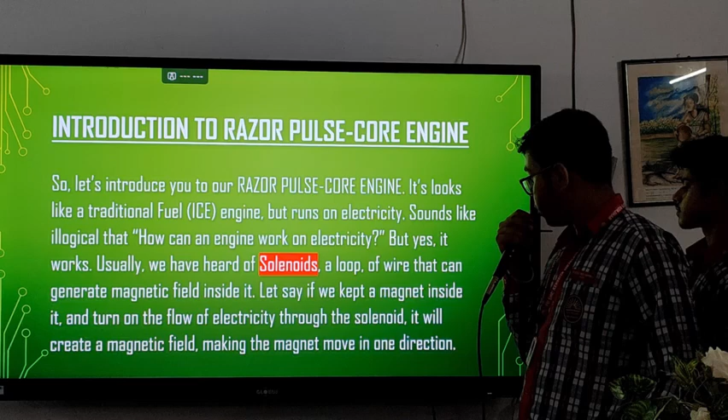But yes, it works. We've heard of solenoids, a loop of wire that can generate a magnetic field inside it. If we keep a magnet inside it and turn the flow of electricity to the solenoid, it will create a magnetic field, making the magnet move in one direction.

Now what is the use of a solenoid? As in IC engines, there are fuel systems, spark plugs, and camshafts that burn fuel in the cylinder, creating a blast and making the piston move. Similarly, the solenoids here act as spark plugs that push the magnetic piston downwards, making the crankshaft rotate.

Now, magnetic pistons. We usually hear about pistons. As mentioned in the solenoid topic, pistons are the parts that help generate torque through the crankshaft by having a linear movement. It goes up and down.

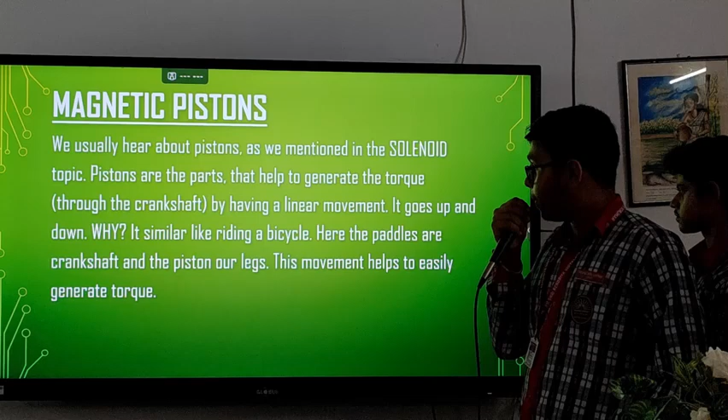It's similar to riding a bicycle. Here the pedals are the crankshaft, and the pistons are the legs. This movement helps easily generate torque.

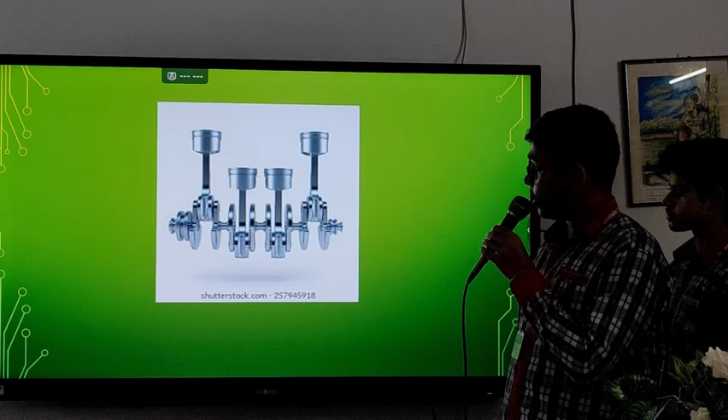Now here is the image of a crankshaft. You can see that the pistons are connected with the crankshaft, which helps move the crankshaft and produce torque.

Now let's bring it to real life car implementation. We have taken our sample model, our design, the Sam Legacy Light GT. We chose this as its manufacturing cost is low, and it has a powerful engine that will help us realize high power performance.

Now we have made the car, but there's still a question: why are we using an engine that runs on electricity? The main reason is that it supports our regen tech. Let's know what our regen tech is and how it supports our RPC engine.

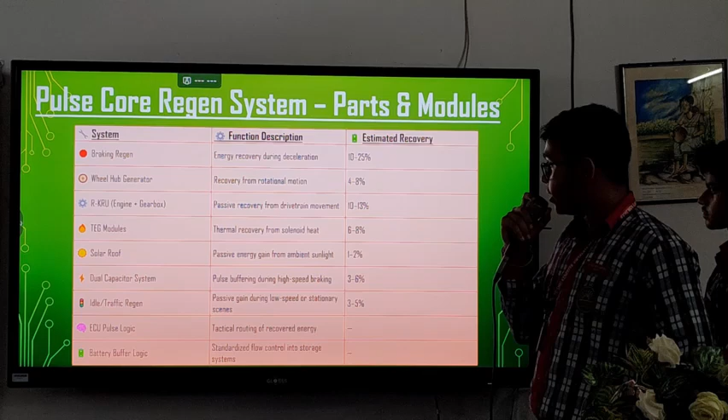Now let me introduce our next part, the Pulse Core regen system, parts and modules. It has the following parts: braking regen, wheel generator, R-KRU included in engine and gearbox, TEG module, solar roof, dual capacitor system, idle traffic regen, ECU pulse logic, and battery buffer logic.

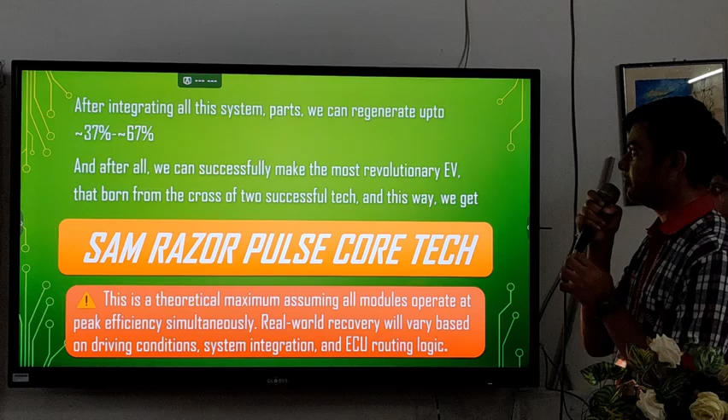These each contribute 10 to 25%, 4 to 8%, and at the end 3 to 5%. After integrating all these system parts, we can regenerate up to 37 to 67%.

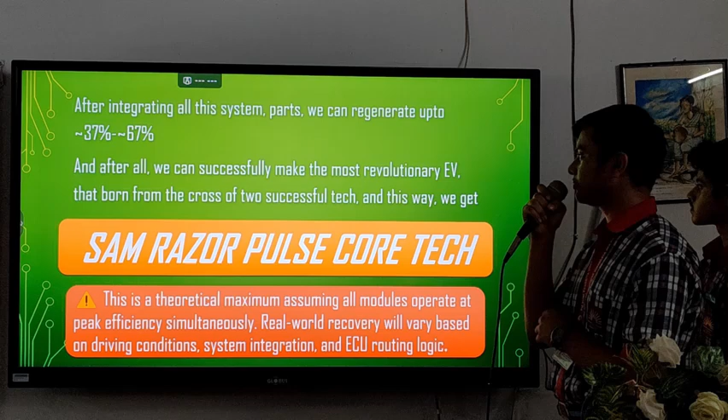After all this, we can successfully make the most revolutionary EV, born from the cross of two successful technologies. And this way we get the Sam Razor Pulse Core Tech.

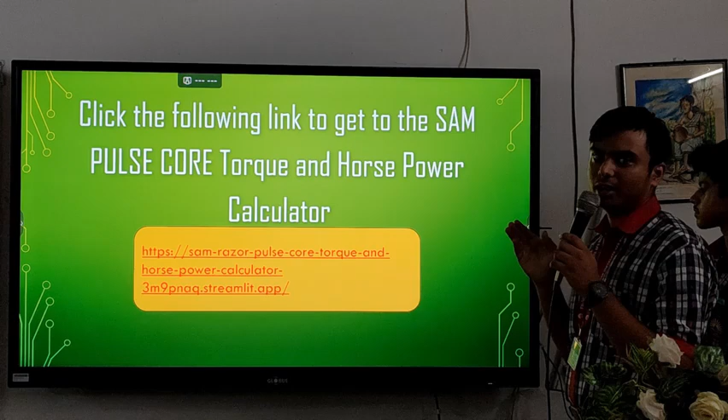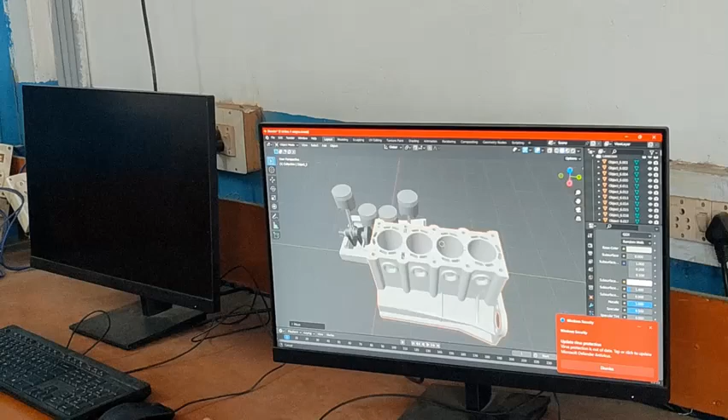Here we can attach the solenoid bobbins. Now these are the magnetic pistons. On these pistons, we will attach magnets on top so that the magnets can be easily repelled.

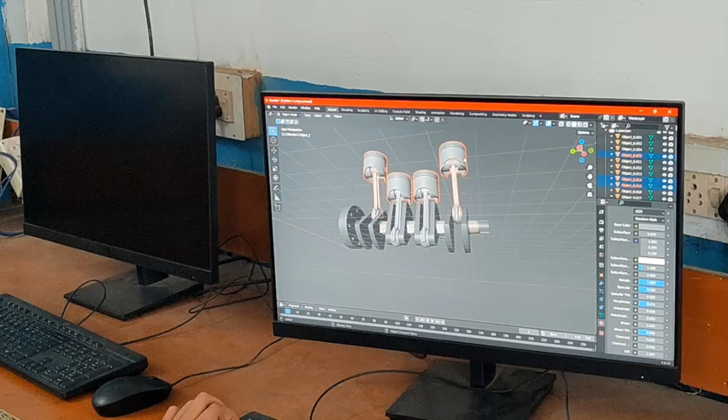Now this is known as the crankshaft. This crankshaft will rotate through the magnetic piston movement, so that we can easily generate torque from this high end. So this is our prototype.